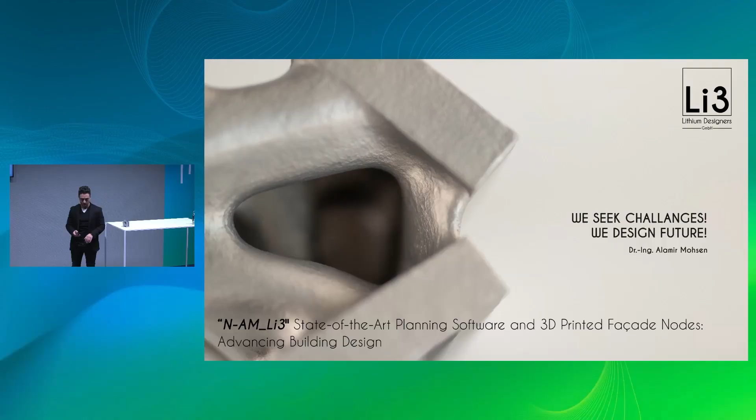Then I will start with a short video introducing our office and what we actually offer. Then I will dig deep into details, giving you an insight about what we offer and what we actually managed to achieve. So starting from this, telling simply our story.

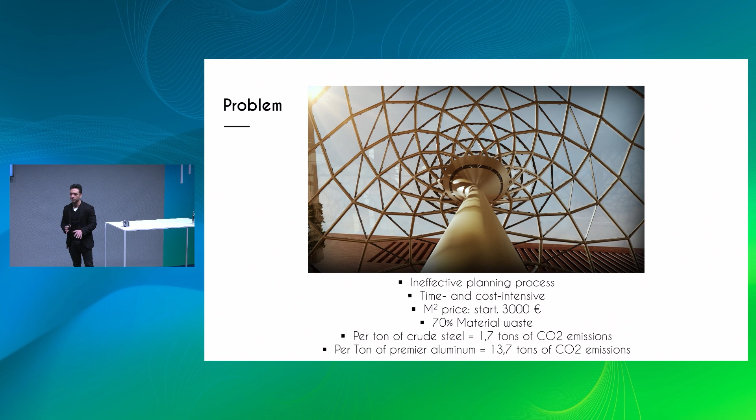So let's go to the problem. What we have at the moment in the planning and the design of freeform facades and building envelopes is a huge problem, because we have ineffective planning processes, which are time and cost intensive. We talk about 3,000 euro per square meter. And when we discuss CNC parts, we talk about over 70% material waste.

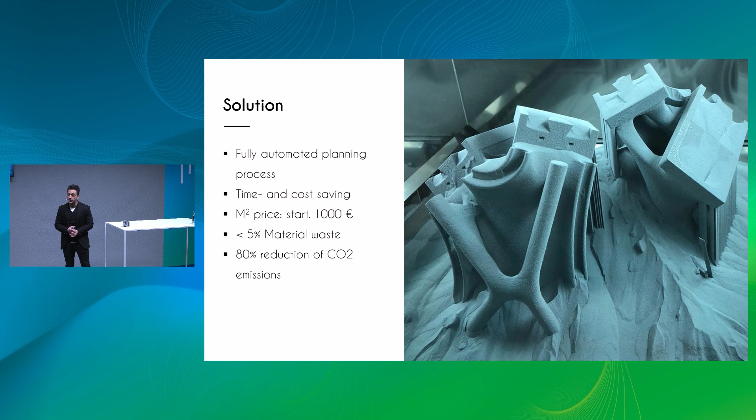So we need a new solution that expresses to the market a sustainable, new way of planning freeform and large-scale projects. And here we offer our solution, which is a fully automated planning process, which is time and money saving. We talk about a square meter price around 1,000 euro per square meter, less than 5% material waste, and 80% reduction in CO2 emissions.

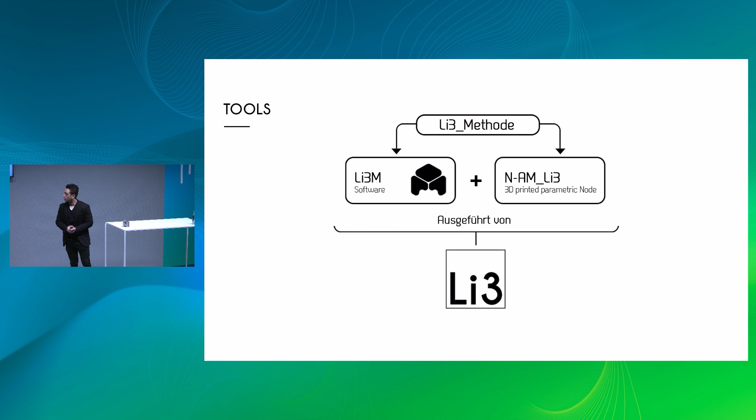So how we achieve this is what we call the Li3 method. It consists of two main parts, our software and our 3D printed nodes, and it's done and executed by us. You can see one node here in my hand. The main idea is we have a fully 3D printed topology optimized node. So we have only the material that we need for a certain loading condition, not more, not less. The only waste would be the support structure of these nodes, and this is really pretty minimum. The next part would be our software.

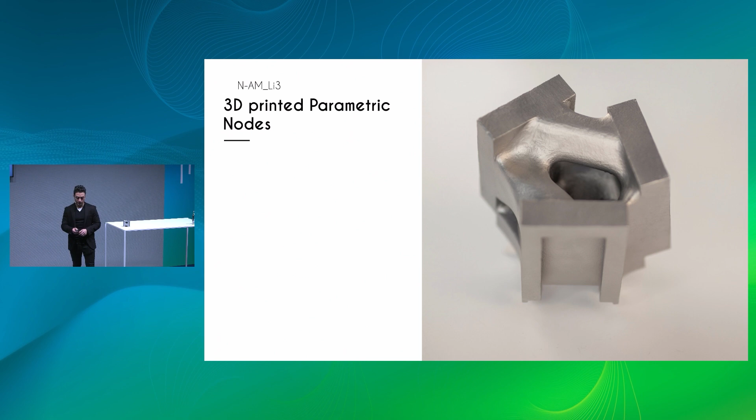What we managed to do is to eliminate the complexity in freeform geometries and facades. We take the geometry as a base and we transform it into Lego-like structures. So we break down any sophisticated geometry into small parts that can simply be connected together, and in this case those will be the nodes, profiles and glass.

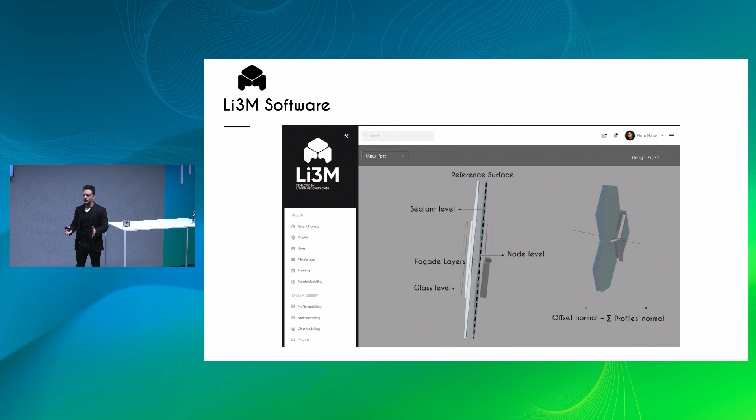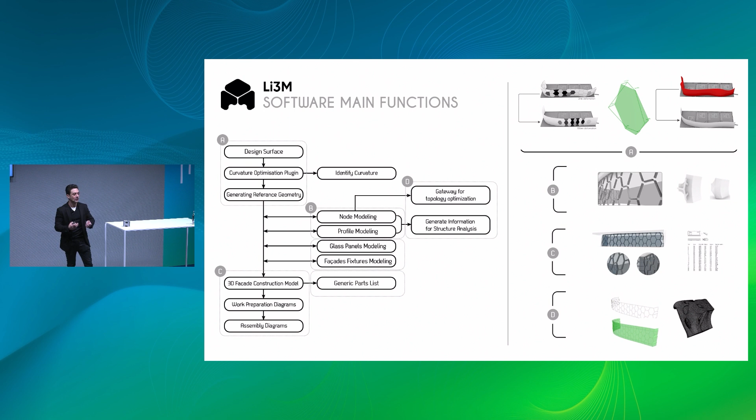How our software works, you can see here, we divide our workflow into four main stages. Once we have a base geometry, we can start to optimize it according to the manufacturing limitations of 3D printing or glass manufacturing. Then we start to break it down into pieces and parts. We get the nodes out of topology optimization, we get the manufacturing lists, and we can get from that model all needed information for execution and for building up this project.

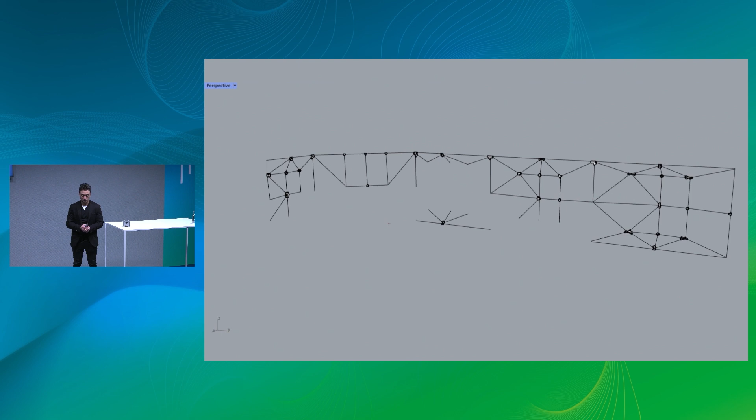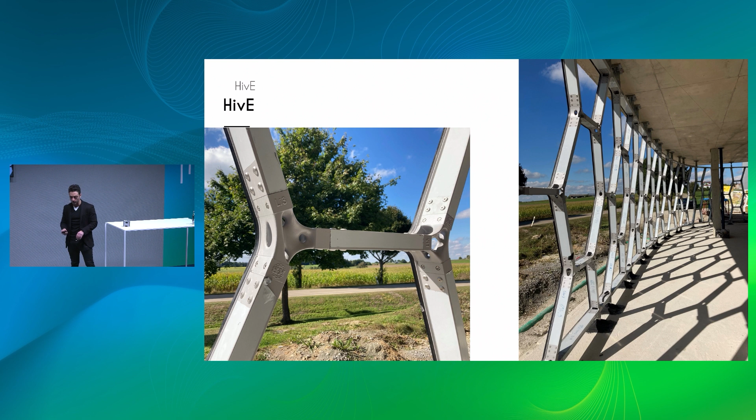So let's talk about the projects that we already built. We start with our first case study project, Hive Project Express, a freeform facade with 134 fully 3D printed aluminum nodes. Here you can see the project after completion. It was finished at the beginning of 2022.

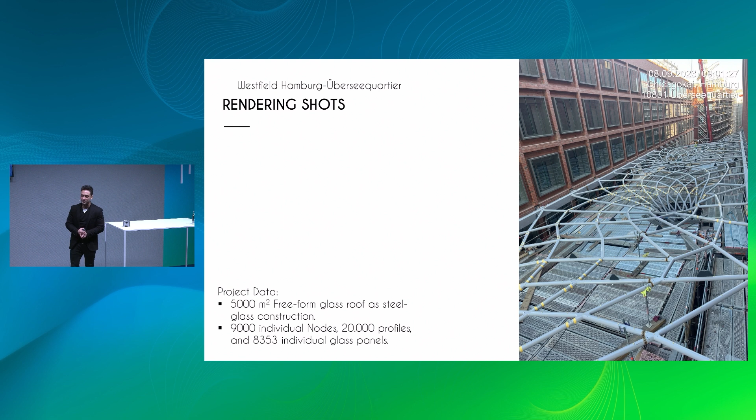Following this project, we were commissioned with one of the largest glass freeform roofs in Europe, in Hamburg. In this project, we managed to automate the generation of 9,000 nodes and 20,000 different profiles. Here you can see the project coming together on site right now. We have 34 columns like this under construction at the moment. At the end comes a glass and aluminum level, and we have a fully automated process done with our software for this unique project.

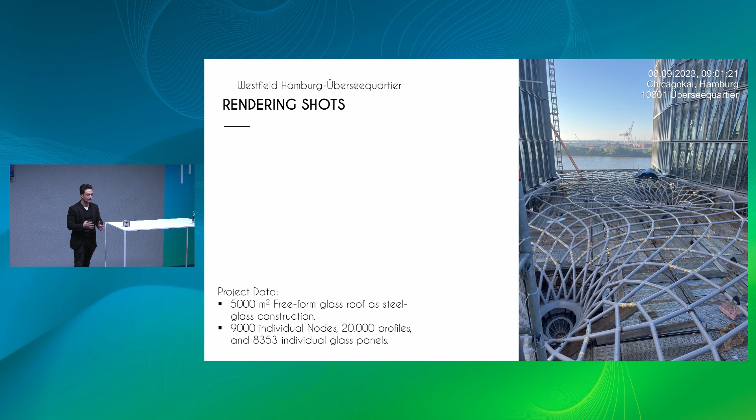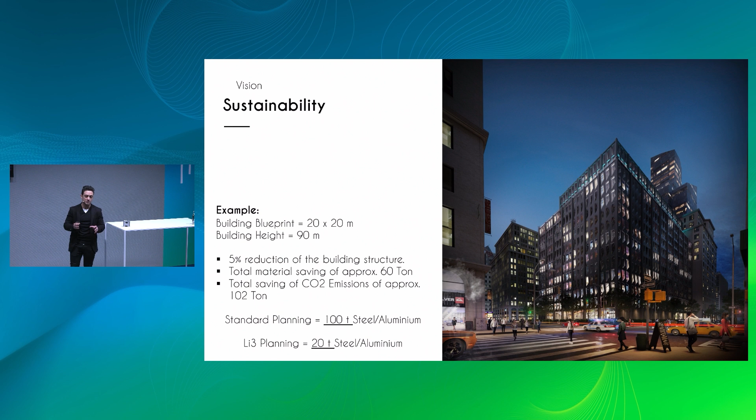So let's go to one more topic, which is sustainability. Let's compare how we work traditionally right now for such geometries and freeform building envelopes, and what we can offer. We took an assumption of a building, and said if we work on this traditionally, we're going to need around 100 tons of steel and aluminum. Just replacing this with our automated planning and 3D printed nodes, we can go down to 20 tons. So we talk about 80% material reduction, and this expresses an enormous saving in CO2 emissions.

We have a patent in Europe and the USA. Talking about certification, we got project-specific certification for our case study project Hive, and we are developing right now our certification like ABZ, the national certification process as a German product. Our latest cooperations, which we are glad to announce today, are Technal and Wicona by Hydro as facade system providers, and AM Global and EOS. The mockup you can see on the EOS booth. I would love to show you the idea behind that concept in the last video.

Will you be around at the exhibition? Yes. The mockup is in the EOS booth. Please feel free to pass by and check it out. There are a lot of nodes to see and touch and see what we can achieve. That's on EOS? Yes. So any more questions, head down there, go and touch and feel the parts for yourselves and see what it's all about.